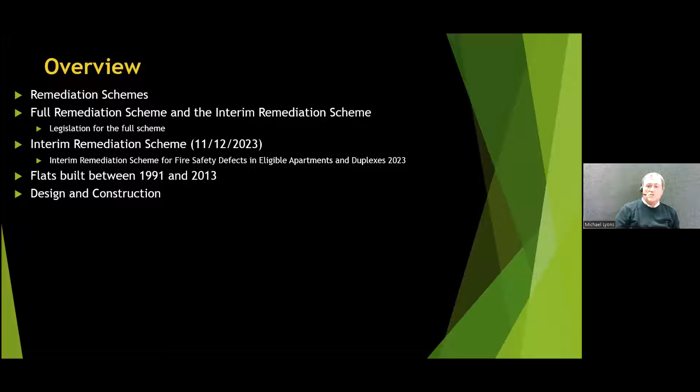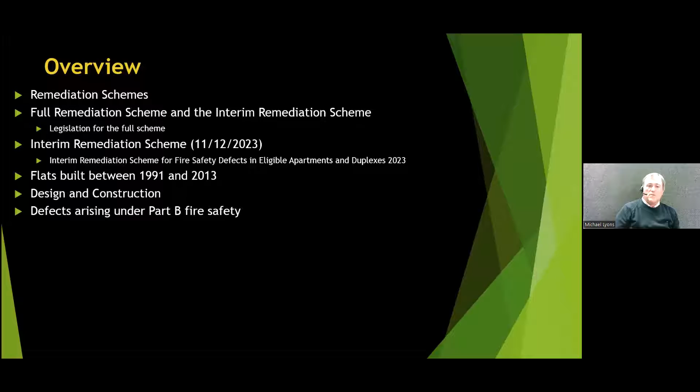It affects both design and construction. Primarily, it's defects that arise under a failure to comply with Part B in terms of design and/or construction. We ended up producing this code of practice for the remediation of fire safety defects, which can be downloaded from the Department of Housing's website. It was issued in July 2023.

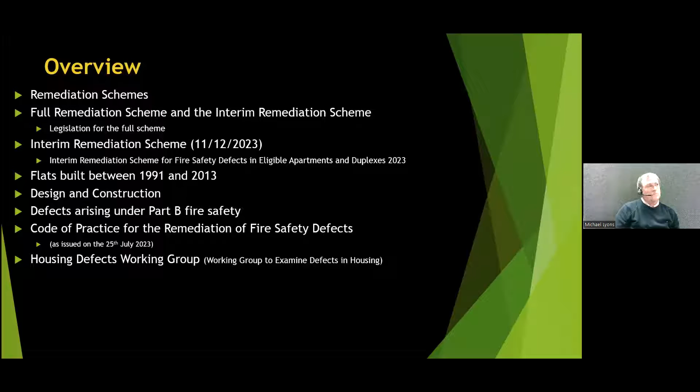It arose, the code of practice, as a result of one of the conclusions made by the working group, which was set up by the minister back in 2020. The working group went on for about 18 months, and I'll come back and introduce that.

One of the things that also came out of it was the importance of carrying out fire safety assessments. It set up a process, the remediation scheme has set up a process for remediation.

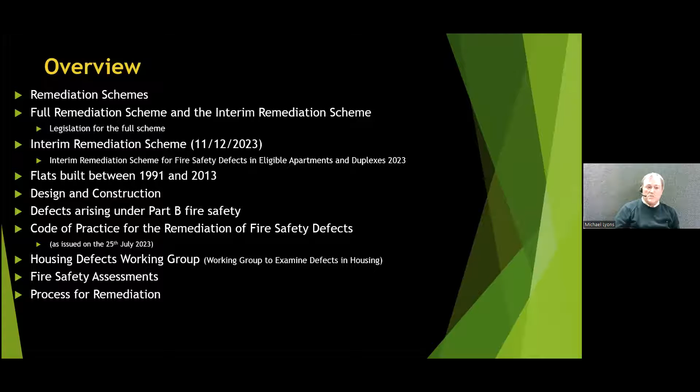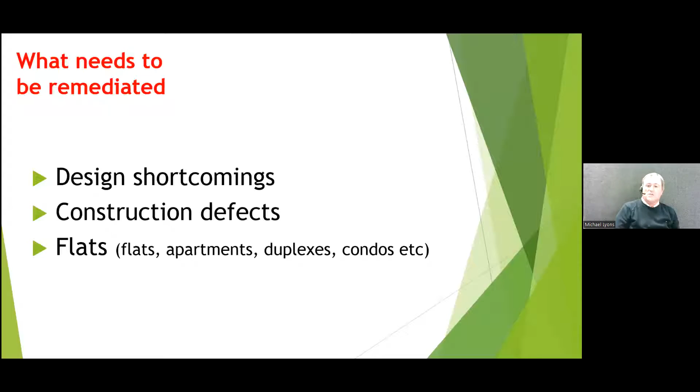So what needs to be remediated? It mentions design shortcomings, construction defects, and it applies to every type of flat. From the point of view of the building control definition of a flat, this will include everything from a bedsitter, a flat, an apartment, a duplex, condos, however expensive or however cheap they might be.

So the actual remediation scheme is to allow rectification works to be carried out, and those rectification works will be measured and then paid for by the public purse.

Now, it's set up under the auspices of Minister Darragh O'Brien. The Department of Housing, Local Government and Heritage leads it. They have made use of the offices of the Housing Agency to act as the agent behind the carrying out of the remediation scheme.

There's a number of phased actions required to achieve the conclusion of the scheme. It involves the owner's management company on behalf of the owners of apartments in a block. There will be a need for a fire safety technical audit report, an assessment report that has to be carried out by a competent professional technical person.

The premises must be registered with the Housing Agency. The extent of the defects have to be quantified by the audit team. There then has to be a remediation action plan set out by the competent professional person. There must be liaison with the fire authority, the local authority fire service, as the code of practice refers to it, and again that would be done by the competent professional technical person.

Then there must be a remediation team, including a competent builder, that has, at the end of the works, having been inspected and confirmed as being compliant. There then needs to be certification of those remediated works. And then the state is paying for those remediation works.

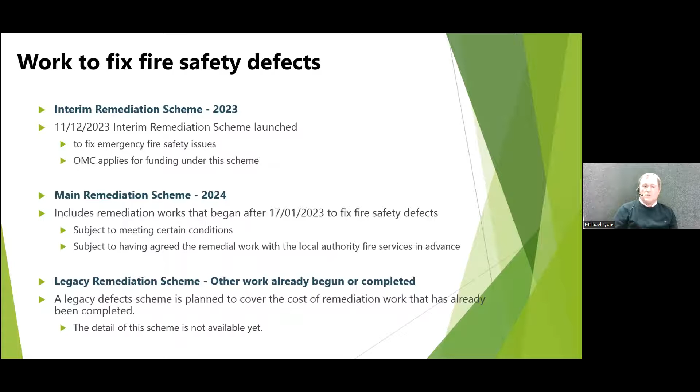There is mention of this legacy remediation scheme. There's no real details given on it yet, and that's really in relation to premises where works have already been carried out outside of the agreed dates for either the interim or main scheme, and that there would be some opportunity for people to recoup the monies they've already spent. But as I say, I haven't seen any details of it, and there's been no published data as to what might be involved in it, other than a more indirect reference to the fact that something will happen at some stage to do with this, what I've called the legacy remediation scheme.

So in terms of the eligible premises, the eligibility arises from the fact that there is multiple ownership, that there are a whole lot of common areas, and the eligibility of any applicant will be decided upon by the Housing Agency. The owner's management company leads the application.

There's effectively a validation stage, and an application form will be signed out, application made, a grant agreement made between the Housing Agency and the owner's management company, and then a liaison person will be designated by the owner's management company to be the contact person on behalf of the owner's management company during that period.

We'll come back to that anyway. I just want to give some context as well to where this came from. An awful lot of preparatory work was carried out.

Initially, I suppose the first step was the setting up of this working group. You can see there it was chaired by Seamus Neely, the former chief executive of Donegal County Council. Great guy, had a really difficult task. There was a big team on board the working group, and it was all done voluntarily.

There was a very broad discussion. A whole lot of different people were contacted, lots of presentations were made. There was an awful lot of meetings over an 18-month period. Eventually, it represented both Engineers Ireland, RIAI, the Society of Chartered Surveyors, the Building Alliance, the Housing Agency, and the department itself. They did an awful lot of Herculean work really to come up and provide for everything.

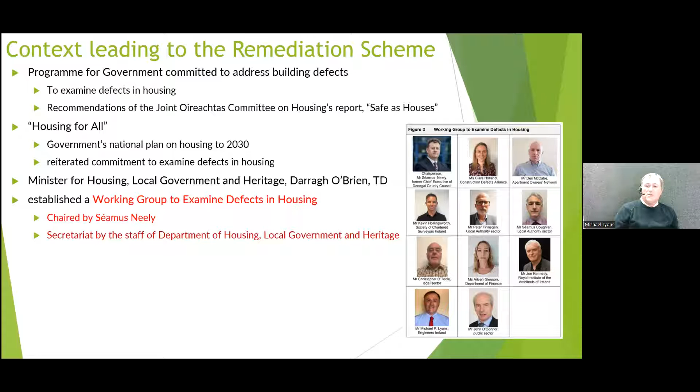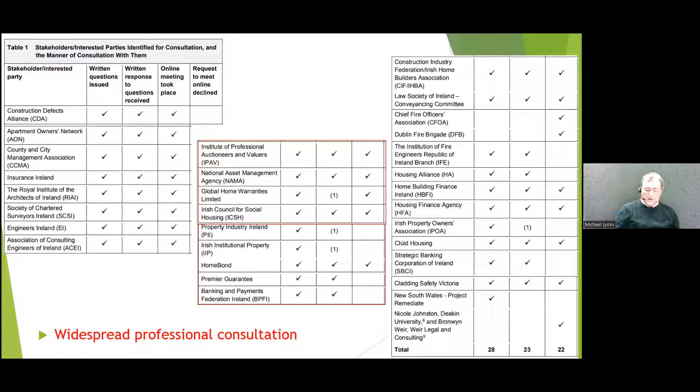Just to give a taste of how widespread the consultations were, here's the list of all the various different organizations that were contacted and made presentations to the working group. Information was gathered from them, everything from the owners network to the County and City Management Association, right through to the construction industry and the chief fire officers. We even went as far as interviewing people from Victoria in Australia and New South Wales to get an idea of the same approach or difficulties that they particularly had themselves.

One of the interesting things we discovered was that in the state of Victoria in Australia, there had been a fire in a building in the city of Melbourne in 2014, in a Lacrosse building, and it created within Australia an intense focus on the quality of their building work. The government there set up a task force, which ended up bringing in a number of provisions. One of them was a remediation scheme for external cladding, and the agency that oversaw that was called Cladding Safety Victoria. They had a fund of $600 million for the buildings that they had.

It caused a sweeping review of the regulation of construction in the state of Victoria, and also then a review of the building code of Australia itself. They also identified that there was, as a consequence, a major insurance challenge for professionals, and they weren't sure what the solutions to the problems presented were. But what they did recognize is that there would be a cost for construction.

They actually introduced this building permit levy on all future constructions to pay for the actual rectification funding. But they also recognized that there would be an impact on industry itself, the risk that might be taken in construction, and then also on all the new kinds of construction and the solutions needed to solve things.

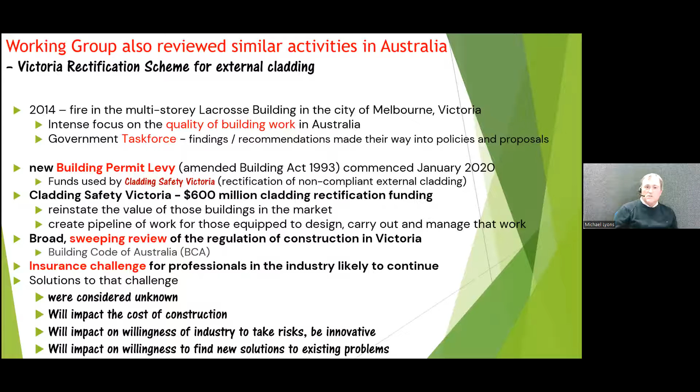But at the end of the 18 months, the working group published our report, and it entailed identifying that a process was needed - a process of discovering and identifying defects in apartment buildings, a scheme for remedial works to be identified, and engagement with whoever the statutory bodies would be, typically your building control authority and your fire authority.

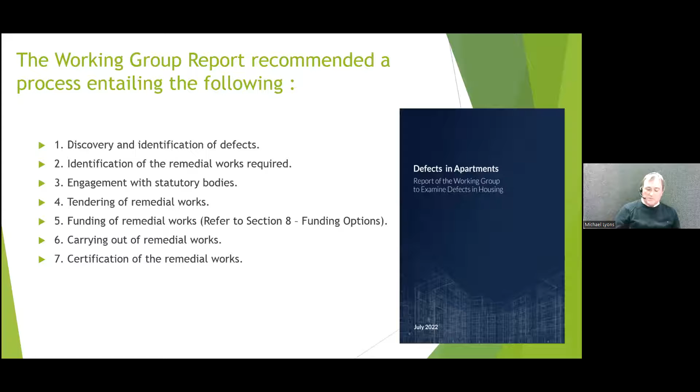There would be tendering and getting a cost for what those works would be. There would be an agreement for funding, and then there would be the process of carrying out the actual remedial works, and ultimately certification of them, so that the buildings in question could be put back on an open market at some stage in the future with a clean bill of health from a constructional point of view.

Some of the interesting things that we discovered was the extent of the problem. And while our remit was to look at fire safety, structural safety, and water ingress defects, it became very clear that the most prevalent defects related to fire safety. Among the totality of the number of buildings, anywhere between 50 and 80% of buildings are adversely affected.

Given the period of construction from '91 to 2013, that would mean anywhere between 62,500 and 100,000 apartments would be affected by that. 40 to 70% of properties are affected by fire safety defects.

Not to play down the impact of water ingress or structural safety defects, but it became quite clear that the extent of water ingress was somewhere between 20 and 50%. And all of this estimation was based on feedback that was received from a very broad canvassing of owners, management companies, and replies that were given back to them.

And I have to pay tribute to the civil servants who were on the working group for the work that they put into getting all of that information together and presenting it.

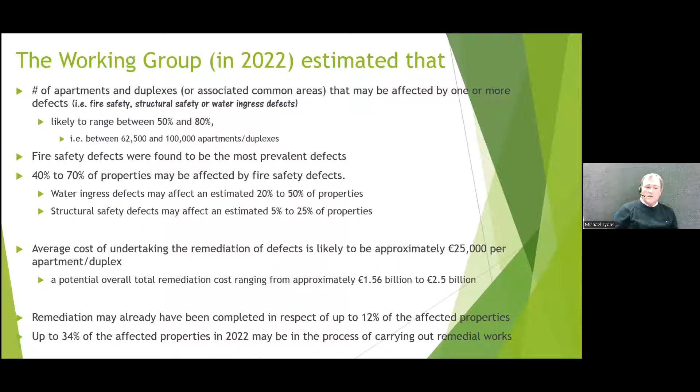It was also recognized that an awful lot of owners, management companies, and owners had already started rectifying defects that they had come across. We reckon that maybe up to 12% of properties had already started, if not completed, the remediation of certainly fire safety defects that they may have found in their properties. And another 34% were already in that process of trying to rectify it.

When it comes to anybody engaging with the remediation scheme, a number of documents will be important, published by the Department of Housing: the Fire Safety Guide for building owners and operators, especially then the Code of Practice for Fire Safety Assessment of Premises and Buildings, and the Code of Practice for Remediation of Fire Safety Defects.

Since then, there's been the publication of the frequently asked questions and an explanatory guide for that. And then most importantly is the applicant pack for any applicants who go into the scheme.

So just to get a few things out of the way - one is just definitions. Flat covers everything; it's the building control definition of flat. The protected stairway, corridor, shaft, lobby will all be understood by means of the definitions from Technical Guidance Document B.

Disputes can arise between people's interpretation as to fire stopping and the provision of cavity barriers. Fully understanding what a cavity is and where this starts becoming important is one of the issues we wrestled with - the whole area of common areas and what's understood to be common areas. And then another type of cavity is the plenum space, the space above the ceiling inside an apartment, that suspended ceiling space above an entrance hallway or above the flats itself.

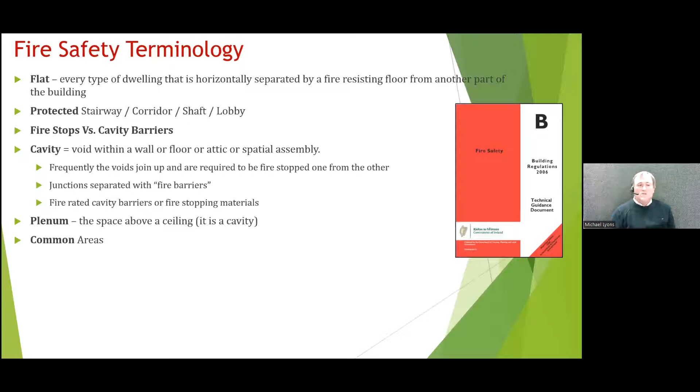But ultimately, coming down to what is understood by common areas, a definition was provided in the code of practice that resulted.

It's important to understand when it comes to the remediation of apartment buildings that the persons involved in doing any assessment have really got to understand the fire safety strategies and the fire safety approaches taken to achieving compliance, not just in terms of compartmentation, but in terms of all the various fire safety measures that may be available to it, particularly when it comes to the interim scheme, because the interim scheme allows for temporary fire safety risk-based measures.

So basic fire safety designs would include enclosing a room, the elements that go into enclosing a room, the importance of each flat entrance door protecting the common area, whether common lobbies or a simple lobby is provided, the whole thing of stairs and its enclosure, the exterior areas, what's understood by common areas, not just a common escape route, but the phrase common areas.

The whole issue of smoke discharge, whether there's particular solutions which have been expected or are found in the premises for smoke shafts or some other kind of maybe mechanical measures, and then all the other issues that arise from linings, the combustibility of linings, fire stopping of gaps, floor constructions, the whole thing of services stacked from story to story, and the in-floor fire stopping versus protected shafts rising from the bottom of Mother Earth all the way up to the roof covering.

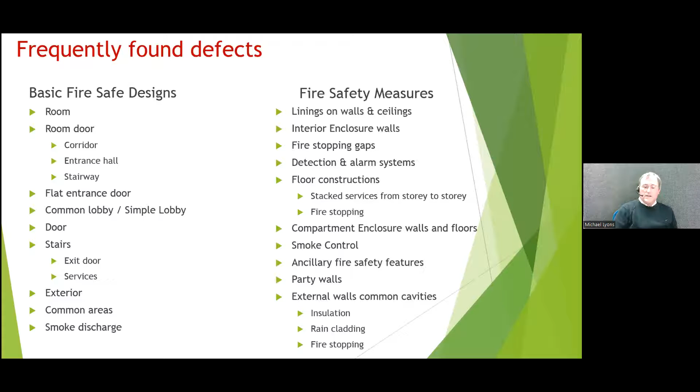And then the whole area to do with who owns what, and the issues to do with external walls and the common cavities in external walls, whether it's insulated, covered by rain cladding, and then the whole area of fire stopping of these.

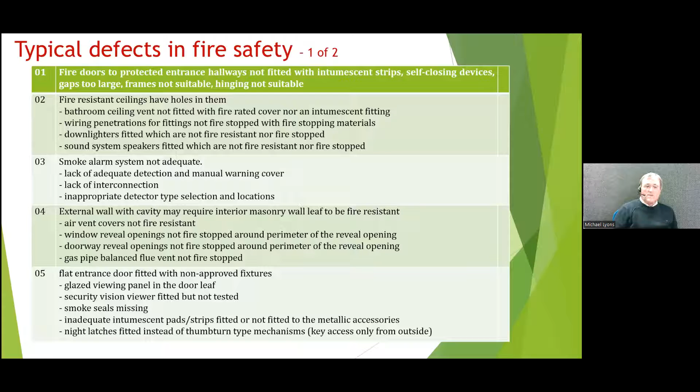The typical kind of defects that we would have come across were everything to do with fire doors, fire resisting ceilings, smoke alarm systems, problems to do with external walls and fire stopping of cavities, flat entrance doors not being fitted correctly or being modified over time, enclosures, fire-resistant enclosures not having been completed correctly.

Everything to do with fire stopping and barriers and staircases, supporting walls, service penetrations, and then a number of different miscellaneous issues might arise to do with things like there's a fire alarm system, but the sound level doesn't achieve the required sound level to wake people up in a bedroom, and how do you solve that?

Issues to do with spandrel walls and fire stopping and services being - builders taking shortcuts, bringing services through a location that somebody may not architecturally expect to happen, but that made sense for the construction team when it was being built, and then the services not being adequately fire stopped for where those services are brought through.

A whole load of issues to do with how you deal with external walls as per Technical Guidance Document B, or maybe having to consider an alternative, but maybe not a TGDB supported alternative, but an alternative that addresses the intention of the actual building regulations themselves.

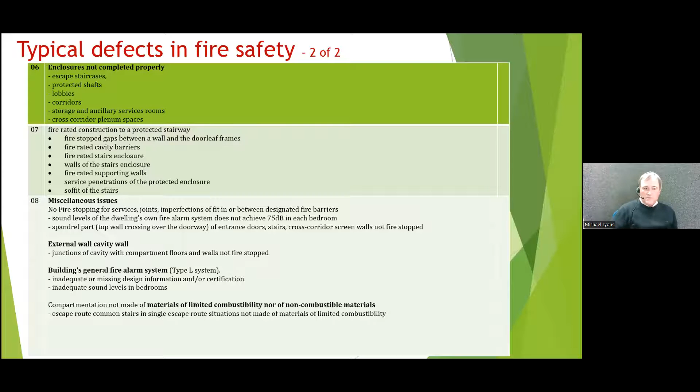So a number of photographs I'm just going to show to highlight the typical kind of issues, problems that arise in relation to attic spaces that may be relied upon as a fire resistant cavity barrier and then not provided with the period of fire resistance.

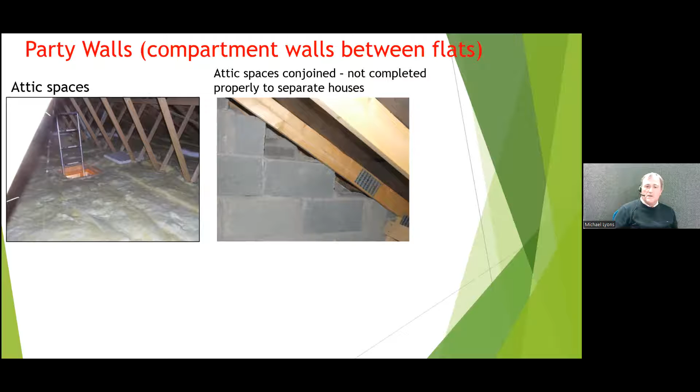And when you come in, you walk through your attic space, you come to a party wall or to a separating wall, compartment wall, and you find that it's not fire stopped with the roof covering, and there's big gaps between one apartment and the next apartment, or between an apartment and a stairwell, like you can see there in the top right of the photograph with the stepped head of the wall.

Things like an external wall, when the external wall is opened up and you expect to see in behind - in the top left of the photograph - your concrete floor slab and a stairwell concrete wall, but instead of seeing the fire stopping in that gap between the external leaf and the actual frame of the building, you can actually see into the flat in the bottom left.

The timber where the arrow head is pointing is a timber framed element of the inside wall of a stairwell on the right hand side. There's no fire stopping between the flat on the lower part, the flat above it, nor against the stairwell.

And then when you look into the photograph on the top right hand side, looking at that vertical wall downwards, you can see the fact that there's no fire stopping between the apartment to the left and the stairwell to the right in that top right photograph.

And then similarly in the bottom left photograph, the external wall is opened up in the line of a compartment floor, and when it's opened up, there's no fire stopping in the line of the compartment floor between one flat and another flat.

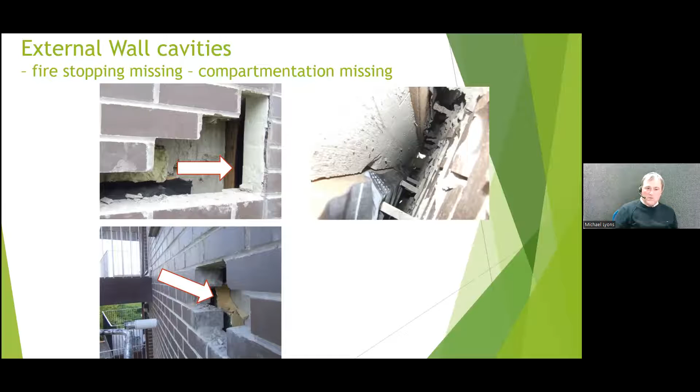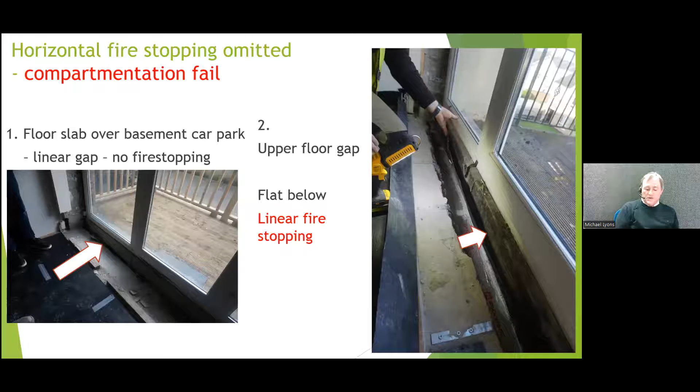As you rise up through the building, on the right hand side is a photograph of a similar gap on upper stories. You can see where the arrow shows the gap there was up to 6 inches, or 150 millimeters, across, and directly below my hand is the kitchen of a flat directly below. No sound insulation, no fire separation, obviously, and retrospectively you've got to come up with an agreeable way of remediating that type of linear gap between one story and another.

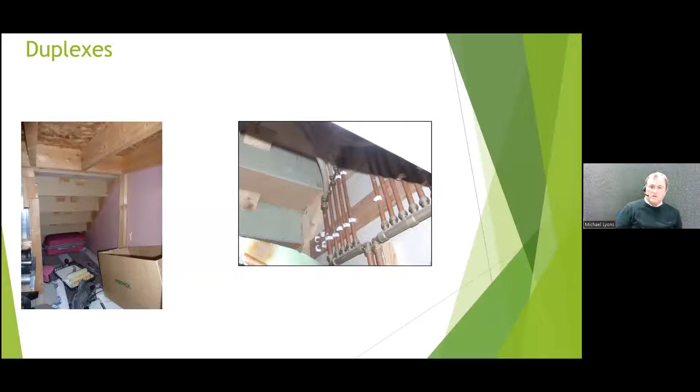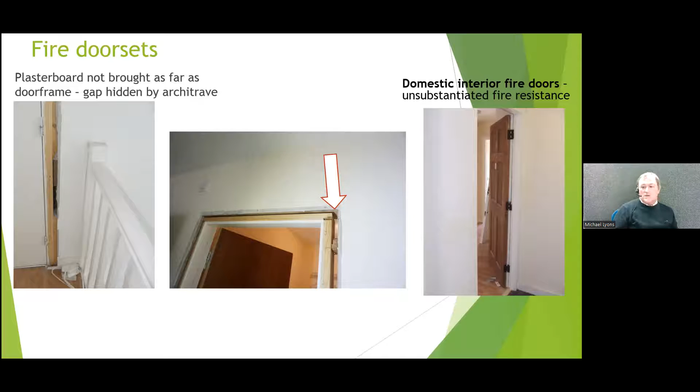Typical issues also arise in relation to doors - gaps around frames and the wall. You can see at the head of the arrow that there's quite a large gap left when the architrave is taken off, and the architrave is not a fire stopping element - the actual physical gap has got to be filled all the way around. There are also doors that may have been fitted originally not as fire resisting doors, with no provenance for the doors, so questions will arise over that.

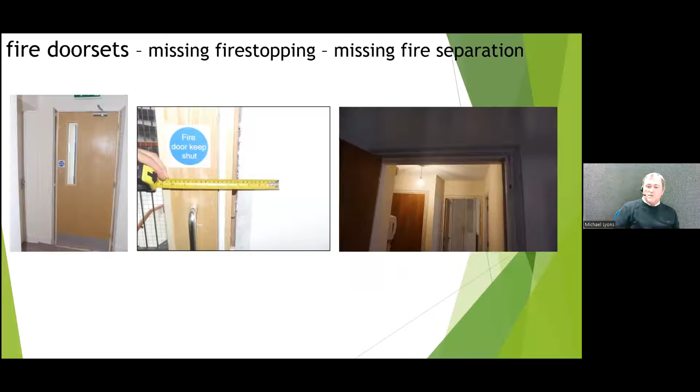Again, more photographs taken of gaps on the left hand side - you can see where the gap is quite considerable, and remediation works will have to follow through on every single door frame to end up with a fire resistant enclosure.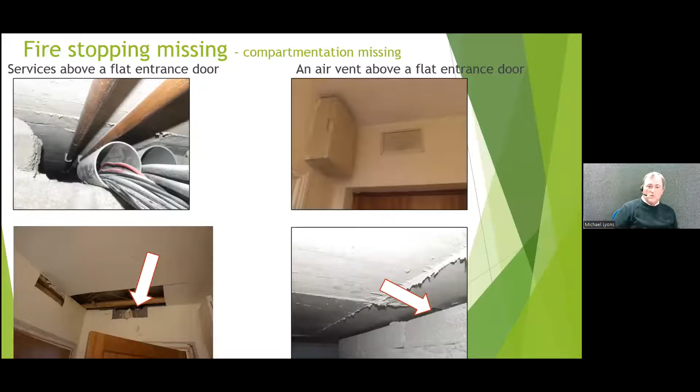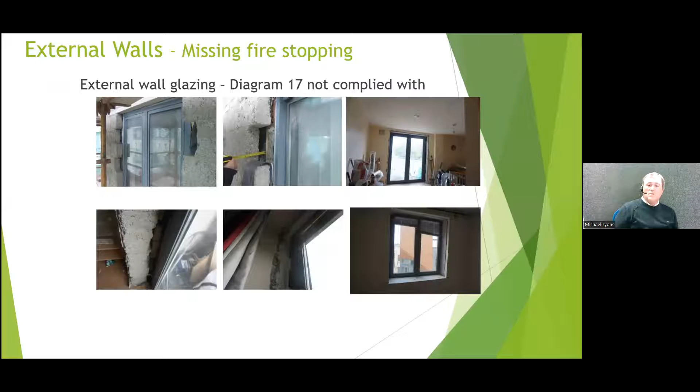External walls throw up all sorts of difficulties, whether they're compliant with diagram 17 and TGD B or not, and then your strategic approach to rectifying that, and how does that tie in with the inter-story fire stopping or cavity barriers to be provided.

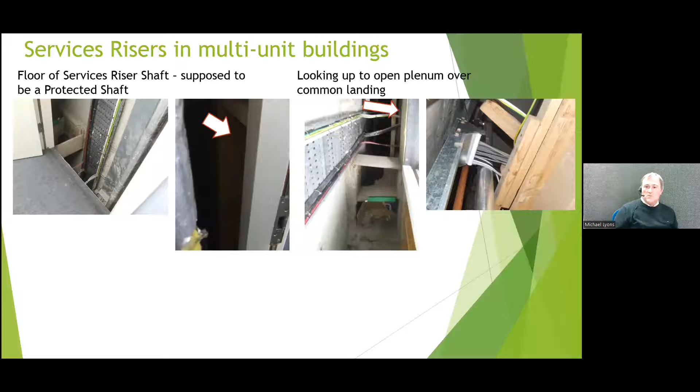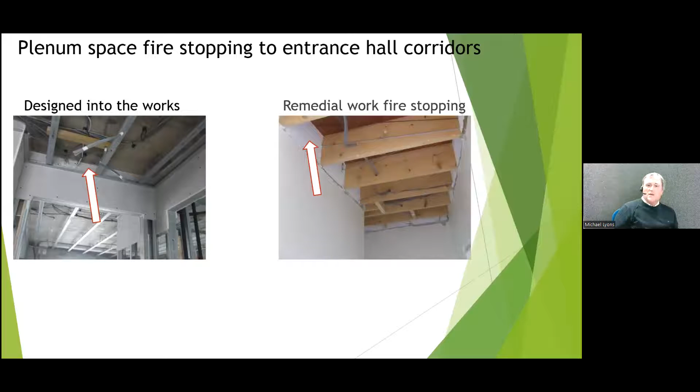The issue of protected entrance hallways is that it's very easy to include fire resistant construction at the beginning, very difficult to go back and remediate it, but it involves removing all your linings and everything to do it.

Same kind of thing with confluences of pipes - fire stopping a spaghetti junction of pipes, pipes being installed but not backfilled or fitted with collars, services like pipes going through walls that again are not made good. They all have to be made good to reinstall your fire resisting walls.

Then a couple of miscellaneous things, like the bottom of a services shaft to a car park that may have been accepted in the past under the 1997 TGD B, remaining silent about it, but in 2024 that would need to be fire stopped at the bottom if you're relying on your supply air to a smoke ventilation shaft.

Silly things like ventilated lobbies, where the vent isn't at a high enough point to discharge smoke that might come out of the top right of the photograph.

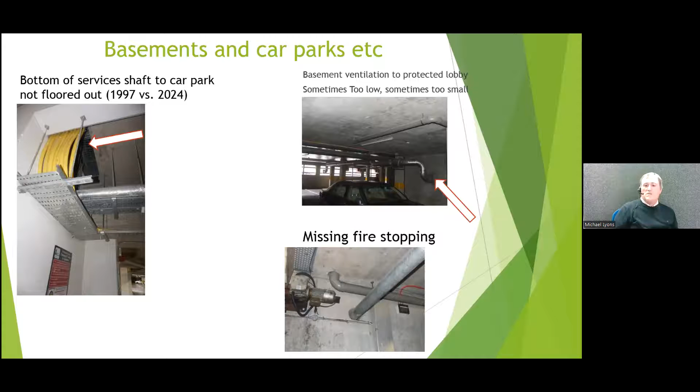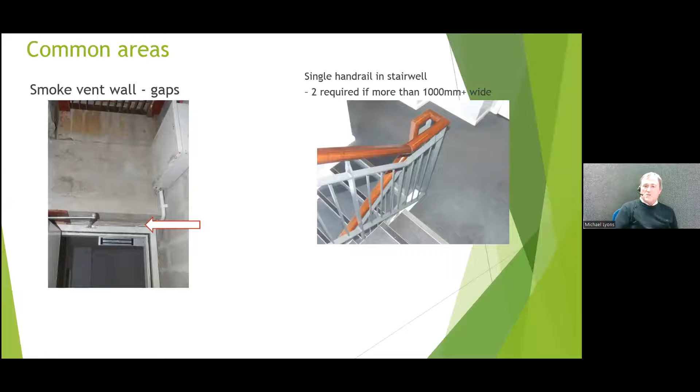Silly little things like, on your escape stairs at 1,000 millimeters or more, there's meant to be a second handrail. A lot of buildings are only installed with a single handrail.

And then also some miscellaneous things that don't show up clearly in our guidance - not clear-cut guidance on it. Things like shelf angles that are exposed to a lower story fire, and how do we deal with that?

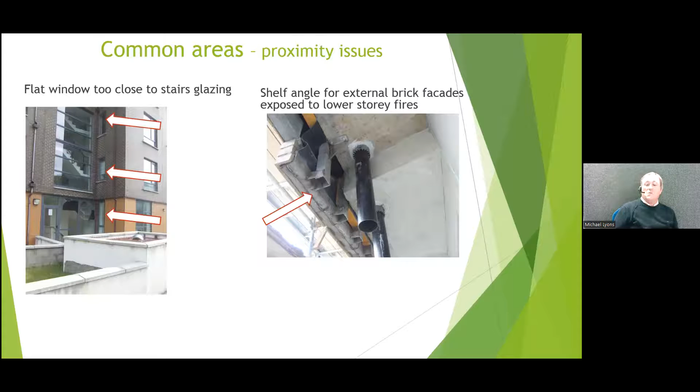The remedial solutions the competent person is going to have to come up with are sometimes bespoke solutions that they feel adequately address the fire resistance of something like an exposed shelf angle, like in the right hand side photograph.

So the process, just to summarize it, is that the applicant, the OMC, will enter the scheme. They'll appoint professional persons - a competent professional person, technical person, and a competent builder. There will need to be a fire safety assessment, as shown in the code of practice.

They'll have to schedule all the defects. Remember, the first scheme is the interim scheme, so it is an interim measure to keep a building open. So there's going to have to be a fire safety risk assessment taken of that defect schedule.

And then an agreed action plan. I'll explain in a short while that there are 3 tiers of buildings identified overall - very simple to address, well, to categorize the tiers, but there'll probably be an awful lot of discussion as to what that means. There's a requirement that there's engagement with the fire authority.

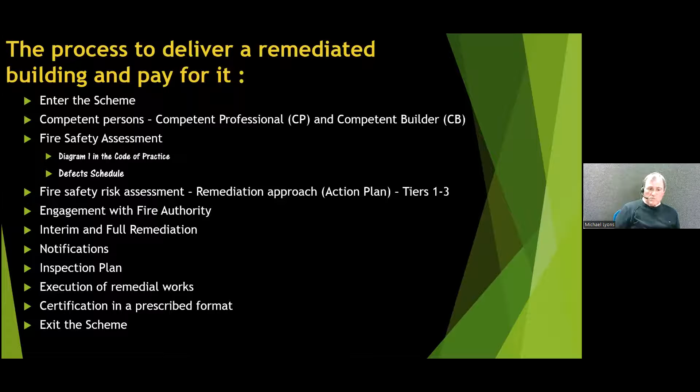As I've mentioned, the interim and full remediation - there are notifications to be issued, then an inspection plan, the execution of remedial works, and then certification in a prescribed format. And then the building and the owner's management company, with a certified remediated building, exit the scheme. So there are 8 phases to any applicant wishing to get money, to get funding, from the remediation scheme.

So phase 1 will include the owner's management company submitting their application particulars, contact information, to the housing agency. The housing agency will receive it, issue a confirmation of validity of the documentation they receive. They'll be given a case number, and then the housing agency will issue an applicant pack back to the applicant.

The owner's management company is required to coordinate a whole load of different things. They instruct and engage a construction professional to do the audit. There will be a need for a written report, a fire safety risk assessment, which will identify the interim remediation works. That will have to be issued in a planned format.

There will have to be engagement at that stage with the local authority fire services, who then will confirm that they have agreed - they may modify it, but they will confirm that they have been engaged with. The owner's management company will have to procure a competent builder. There will have to be a determination of costs for that schedule of defects.

And then the owner's management company will submit to the housing agency, who will assess the eligibility and will provisionally approve funding for the interim works.

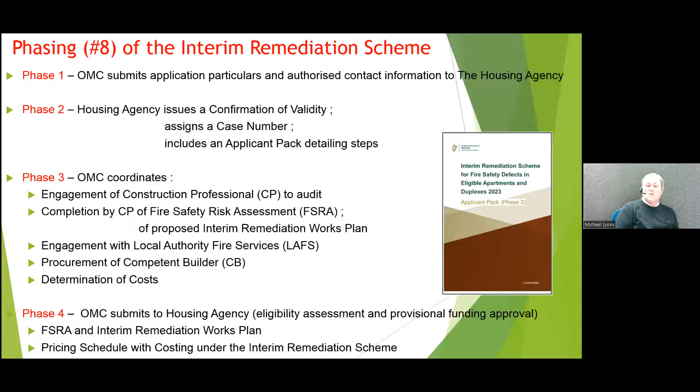Phase 5 will then result in the housing agency issuing what's called a grant agreement. The owner's management company will have to sign off on that and subsequently return it to the housing agency. And then the housing agency can then confirm approval of funding.

And that will allow the fire safety works to begin and for fees to be discharged. A countersigned copy of that grant agreement will be returned to the OMC. And it's very important to remember, this is exchequer funding, so therefore that's why there are so many checks and balances to make sure that everybody has agreed.

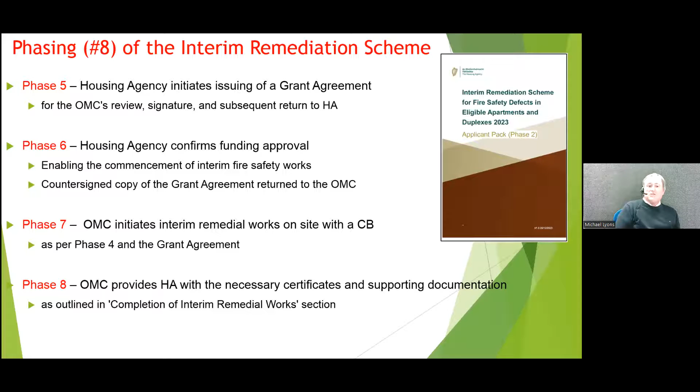Everybody will have a copy of this grant agreement, which will be a very important legal document between the OMC and the housing agency. The OMC will have their competent builder on site, they will carry out the remedial works, and then at the end of the remedial works, the OMC will issue the necessary certificates and supporting documentation so that the phase of completion of the interim remedial works scheme will be arrived at.

It's very important to familiarize oneself with the code of practice, particularly for the technical assessors, and most of our members who are interested in this will have become very, very familiar with this code of practice, which I was involved in writing as part of the team.

Diagram 1 is very important because it's the flow chart that explains the methodology of the code of practice itself, and how to begin with the first inspection, producing and identifying the schedule of defects, and the categorization of the type of premises you have, from tier 1, tier 2, to tier 3. Tier 1 being a building that...

the defects can be rectified within the original fire safety certificate application. Tier 2 is a premises which will be substantially similar to the original fire safety certificate, but there may be a need to make minor modifications to it in agreement with the fire authority, while more or less keeping to

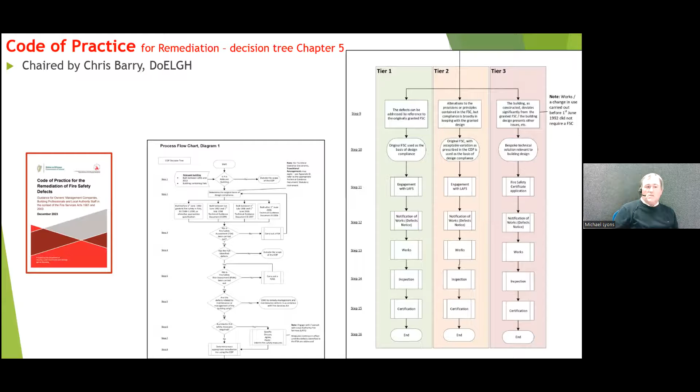the spirit of the originally granted design. Tier 3 is a premises which, because of the defects and the differing from the original fire safety certificate application, will require a new fire safety certificate, or indeed a regularization certificate application, and may entail fire safety engineering solutions. The committee for the code of practice was chaired by the Department of Housing's Chris Barry, one of the fire advisors inside.

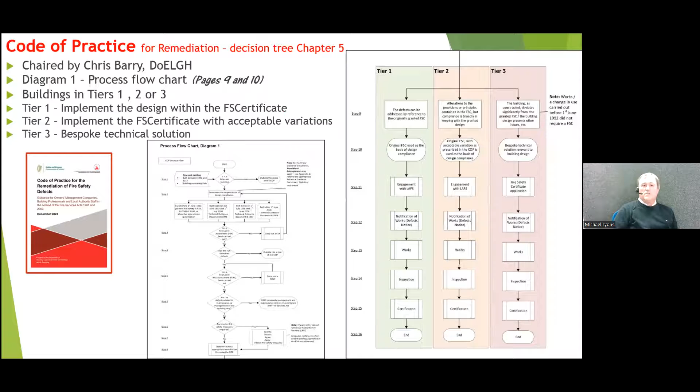But there are a number of elements to the code of practice that are important for people to familiarize themselves with, and that is diagram 1 and the 3 tiers. The bespoke technical solution - the code of practice doesn't tell you how to do it, or what to do, but it does identify the fact that the defective building, or the building with defects, may be so different to the original fire safety certificate strategy that there really is a need for a complete new approach to it.

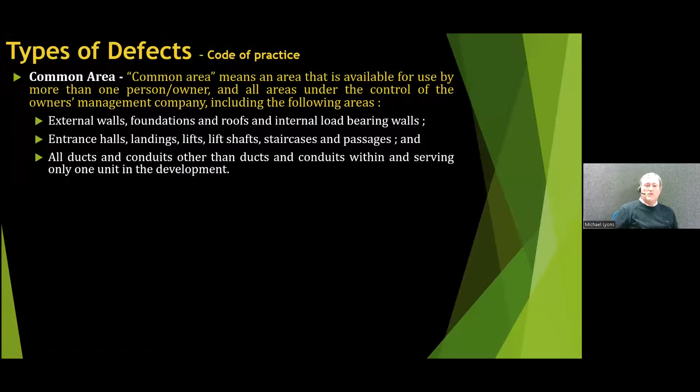The code of practice does give us a couple of different definitions that are important. The definition of common area - one of those things is that it does include the external wall. So it defines the common area as the area that's available for use by more than one person or owner, and all areas under the control of the owner's management company, including external walls, all the landings, lifts, shafts, staircases, and ducts and conduits, but including the external wall.

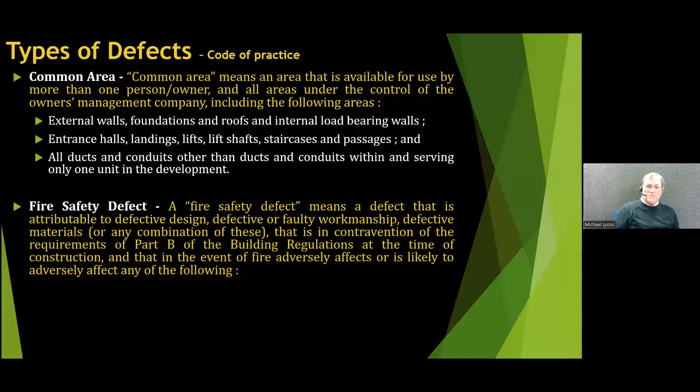It also gives us a definition for what's understood to be a fire safety defect - something that's in contravention of Part B of the building regulations. Chapter 6 deals with fire safety assessment, and Chapter 7 deals with fire safety risk assessment. It's a very step-by-step approach to following the code of practice.

So it's important to understand the basis for the design of compliance, surveying the building, the need to involve opening up works, and recording the fire safety assessment. Every item is a defect in its own right. There needs to be a risk rating provided to it, and then documenting it.

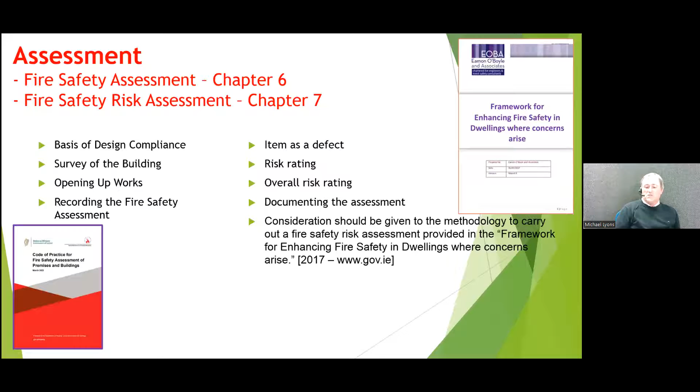Now, during the writing of the code of practice, we had reference to the document produced by Eamon O'Boyle and Associates in 2017, and we refer to that because it's very helpful in informing oneself on how to enhance fire safety in dwellings where there are fire safety defects, and it's referred to in the code of practice as well.

There's a range of alternative features that might deal with interim measures - enhancing fire detection and alarm, management issues to do with things like everything from notification, frequency of drills, emergency lighting, fire safety checks on escape routes, on doors, on storage, the housekeeping issues, the closing down of certain hazards, either on a temporary or long-term basis during the period of the interim remediation scheme, and the importance of flat entrance doors.

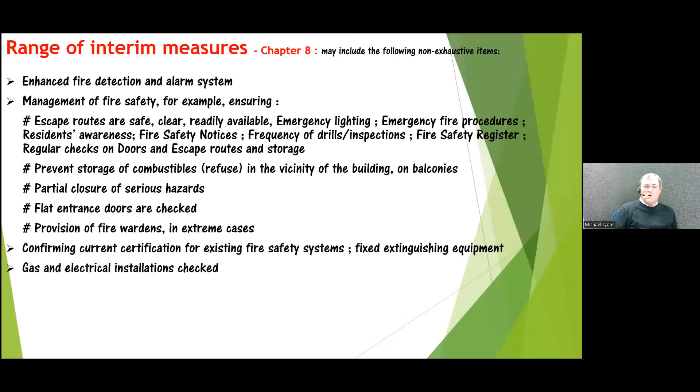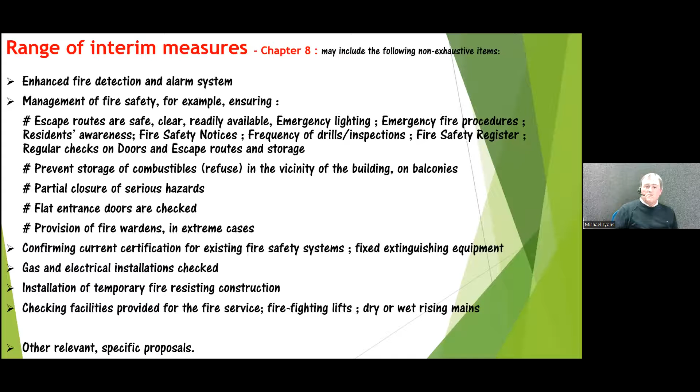It may not be possible in the interim scheme to go into a flat and carry out works, but certainly the common areas would be well protected - that's got to be decided by the remediation team. In extreme cases, there's the provision of fire wardens, confirming certification on systems, the installation of maybe temporary fire-resistant construction that would subsequently be removed, and also liaison with improving facilities, making sure that the facilities for the fire brigade under B5 are addressed.

A mixture of all of those, some of them - the code does identify a whole load of interim measures.

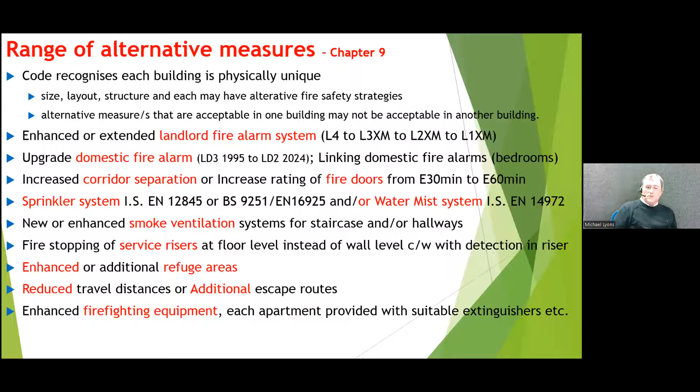The separation, maybe sprinkler systems, smoke ventilation, addressing refuge areas, looking at your travel distances or maybe additional escape routes, enhancing firefighting equipment, and then also looking at fire engineering approaches, all allowed for under the code of practice.

One of the things that arise from it is the remedial works plan, and that's got to provide sufficient detail to inform the local authority that the works being carried out are sufficient to allow a building to continue to be occupied on a temporary basis while the scheme is given effect, until such time as the full remediation scheme comes into play.

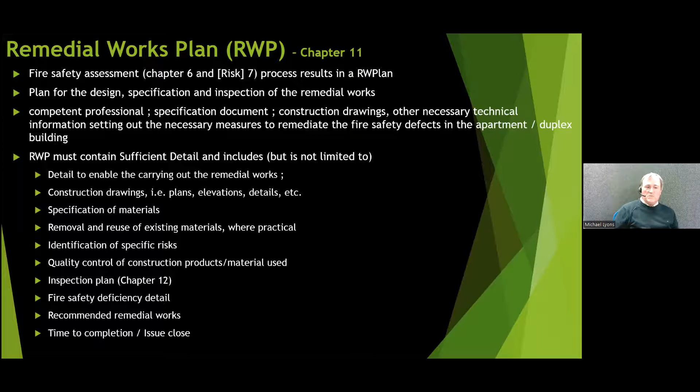Engagement with the fire authority is dealt with under Chapter 13. The interim and full fire safety measures will have to be agreed as to what may or may not be included in the interim scheme, and that is going to be based on the risk assessment carried out.

It's important to realize that the professional competent person is the one who's going to have to write up this plan. The fire authority can give advice, but it's not their plan. And I'm sure there's going to be an awful lot of discussion between the assessing local authority and fire officer when they receive the content of this plan.

Interim measures plan. The Tier 3 approach will be different in the sense that because it's going to follow a different fire safety strategy to the submitted fire safety certificate for the building, there will be a need for a new fire safety certificate application to be made.

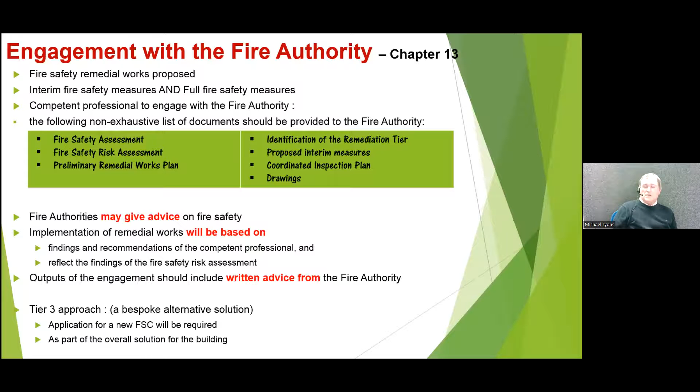So the Tier 3 type premises are probably going to be remediated based on a full BCAR solution.

A number of appendices are found in the code of practice, and there's a pro forma notification in the code of practice. There's a notification letter that's got to be sent to the local authority, and then there's also a pro forma certification of remediation form in the code of practice as well.

The important thing to note about the remediation form is it's got to be signed by the builder, and it's got to be signed by the competent professional person. One of the things that's striking about it from my own point of view is that the professional indemnity insurance has got to cover the extent of the defects as well.

And the intention of the certification is that at the end of the process, the building is certified to be satisfactory to continue to be occupied under the interim scheme. Now, there may be premises where once the interim scheme is completed, the extent of deficiencies that remain are not so much that there's any question on the building going forward.

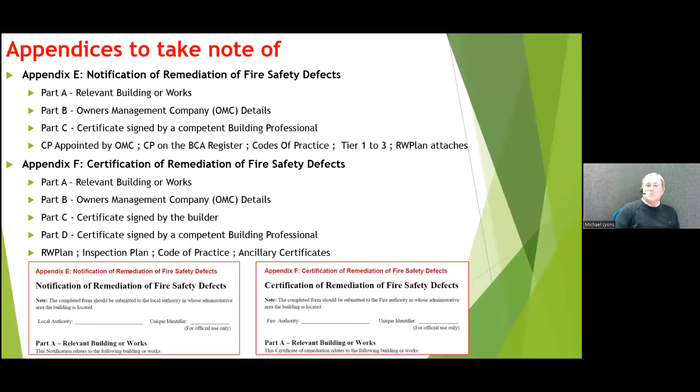But we'll see what happens when the legislation comes in for the full scheme, and whether it's possible for people to certify full compliance of a building subsequently under the full scheme. But the intention is that it's an interim measure under Tier 1 and Tier 2 anyway.